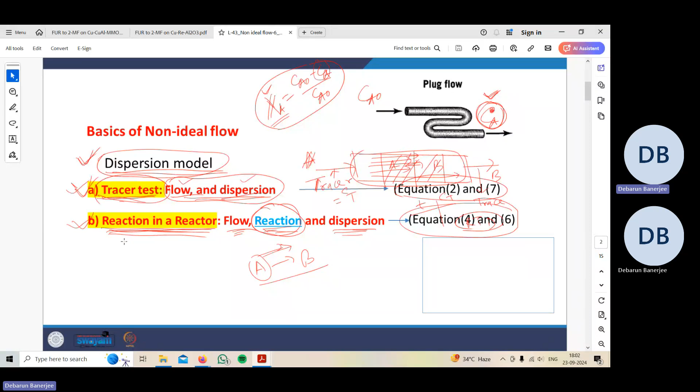For the tracer test, the dispersion model is used to describe non-ideal tubular reactors, where there is an axial dispersion of the material, governed by an analogy to Fick's law of diffusion. So what is Fick's law of diffusion?

It's minus D times Ac dC/dZ for transport by bulk flow, U times Ac times C, in moles per second. So every component in this mixture will be traversing through any cross section of the reactor at a rate equal to this, which we generate from Fick's law of diffusion, resulting from molecular and convective diffusion.

If you see, this is the standard plug flow where there is no difference between each of the molecules. But if there is dispersion in the reactor, then it's problematic - certain molecules will be diffusing forward, and others will be lagging behind. So there will be a different concentration profile with and without dispersion.

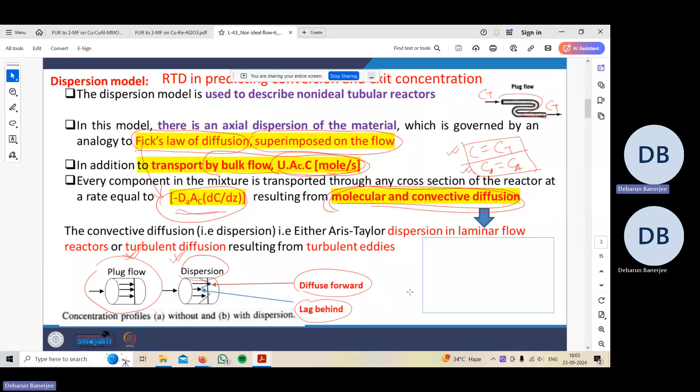That's why we need the dispersion model, which will calculate the dispersion profile. We'll have to see how dispersion affects the concentration profile in a tubular reactor.

Some molecules will diffuse forward ahead of the molar average velocity, while others will lag behind. So we consider the injection of a perfect tracer pulse, and this dispersion causes the pulse to broaden as it moves down the reactor and becomes less concentrated.

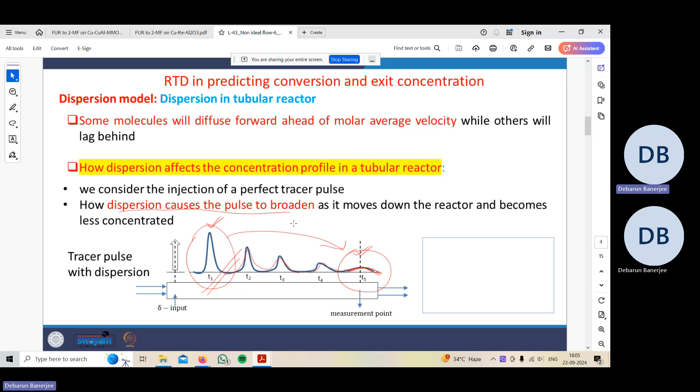We consider the injection of a perfect tracer pulse, and dispersion causes the pulse to broaden as it moves down the reactor, becoming less concentrated. The molar flow rate of tracer Ft, by both convection and dispersion, is del CT del Z plus U CT multiplied by Ac.

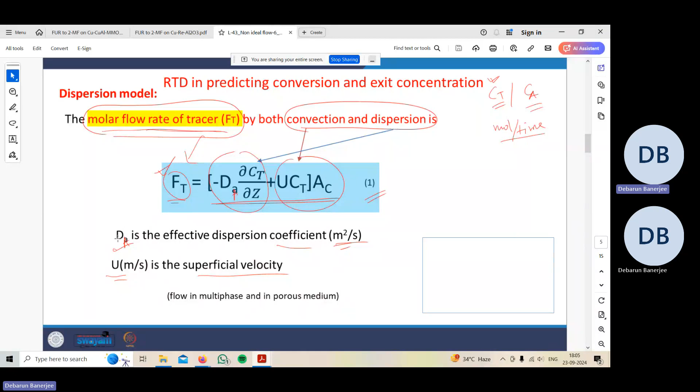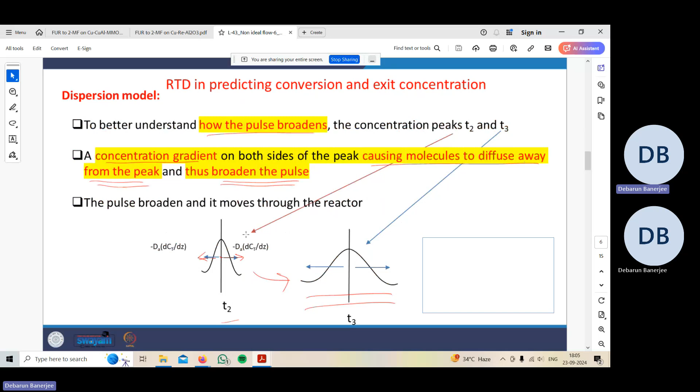To better understand how the pulse broadens, consider the concentration peaks at T2 and T3. A concentration gradient on both sides of the peak causes molecules to diffuse away from the peak, thus broadening the pulse. The pulse broadens from the T2 position and moves towards the T3 position.

If you substitute this mole balance equation, minus del F del Z equals Ac times del CT del T, substitute for Ft and divide by the cross-sectional area Ac, we get this equation for dispersion.

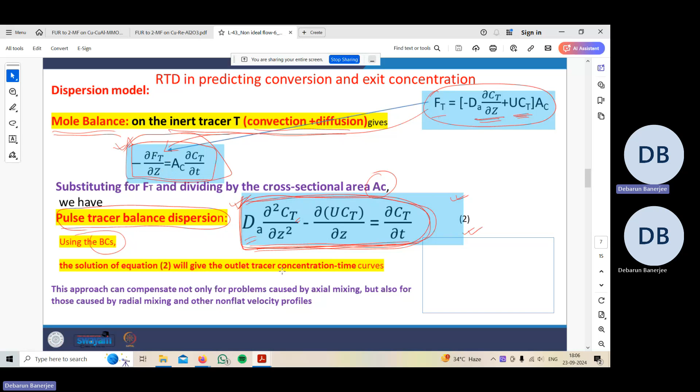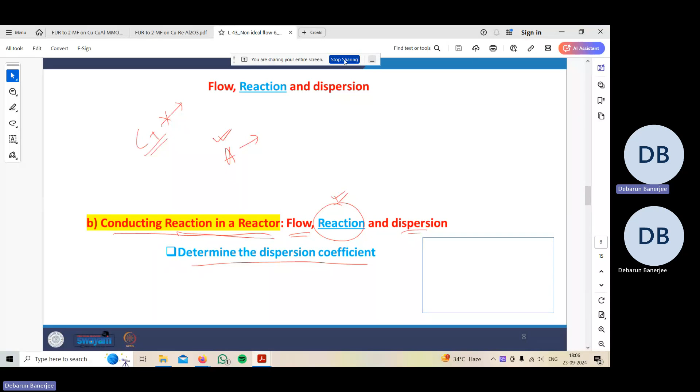The second approach: you have to find the dispersion coefficient, so a mole balance equation of a PFR is required. A mole balance is taken on a particular component of the mixture over a short length delta Z of a tubular reactor of cross section Ac, to arrive at the equation minus 1 over Ac dF/dz.

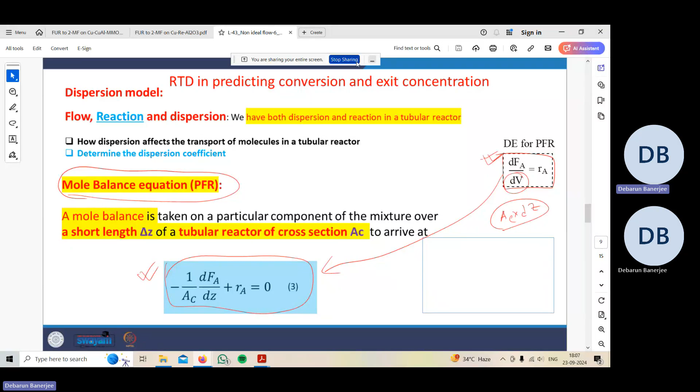If you combine this mole balance equation number 3 with the equation of the molar flux Fa, you get minus 1 over Ac dF/dz plus Ra equals 0, which comes from Fick's law of diffusion as D/U d2Ca/dz plus Ra/U equals 0.

So ultimately, the molar flow rate F in the Z direction of a tubular reactor, Faz, equals Ac WAz, equals minus D(dC/dz) plus CA U Z Ac. So the entire equation represents dispersion plus flow plus reaction - this is the entire regime.

So what is in the dispersion regime? We've seen the dispersion regime - equation 4 is responsible for an analytical solution. What is that analytical solution? We have this solution where we consider phi equals Ca by Ca naught, and lambda.

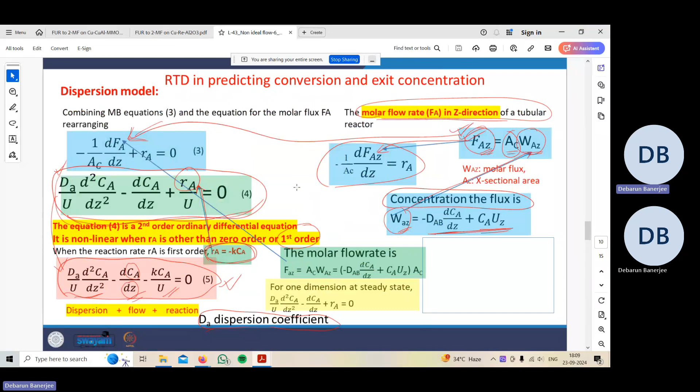These are again characteristics of non-ideal reactors, which are unitless and dimensionless numbers. The Damkohler number is the rate of consumption of A by reaction divided by rate of transport of A by convection, equals to K tau, equals to K CA0 to the power n minus 1.

Similarly, another dimensionless number is the Peclet number, which is the rate of transport by convection divided by rate of transport by diffusion or dispersion.

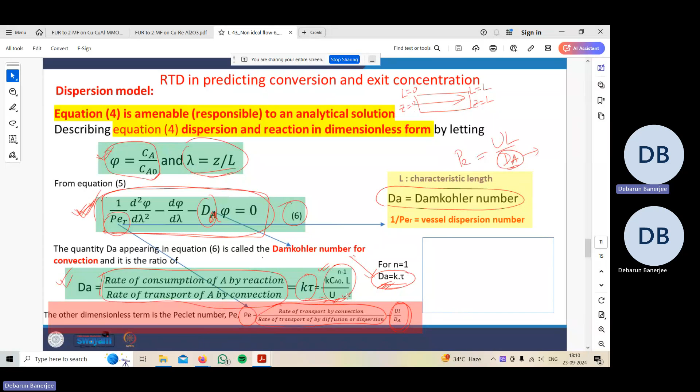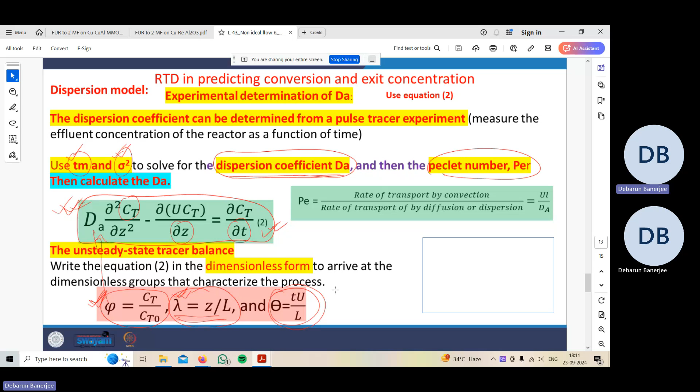Similarly, you can also determine the Damkohler number by experimental observations in this way. The unsteady state tracer balance, as discussed earlier, will have to be used for experimental determination of this dimensionless number.

This is an example of a tracer test, and the method of injection of the tracer is the pulse injection. So find the dispersion number dA or the Peclet number using the tracer test.

The equation is this: 1 by Peclet number, d2 phi d lambda square, minus d phi d lambda, equals to d phi d theta. So the steady state flow of A will give you 1 by Peclet number, and this is a similar formula.

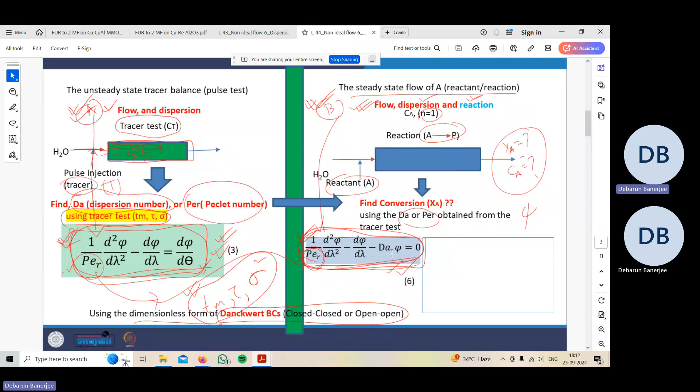What you will have to do is just express it in terms of the Damkohler number.

There are two types of boundary conditions here: one is the closed vessel, one is the open vessel. There is an analytical solution for the first order reaction in terms of the Peclet number and the Damkohler number.

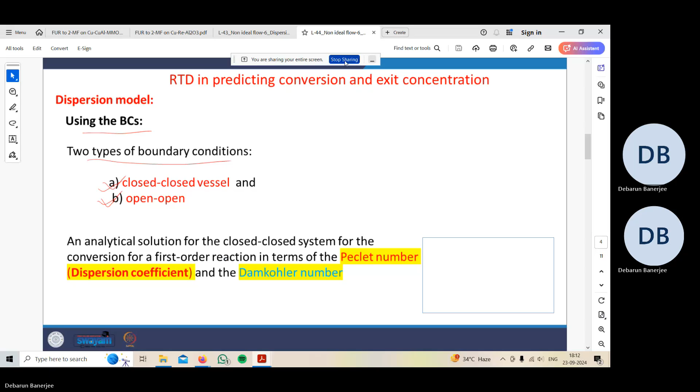For the closed vessel system, the assumptions are there is no dispersion or radial variation in concentration either upstream or downstream of the reaction section. The boundary conditions are imposed on the plug flow velocity profile.

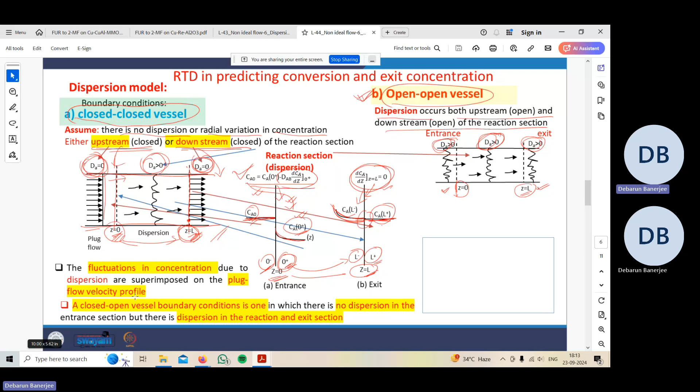In the open vessel situation, the dispersion occurs both upstream and downstream of the reaction section. A closed-open vessel boundary condition is one in which there is no dispersion in the entrance section, but there is dispersion in the reaction and exit.

Ultimately, you have to solve this particular equation shown here. You'll have to solve the equation, and ultimately you'll get CA naught equals to minus dA by U, del CA del Z, at Z equals to 0, plus CA 0 plus, based on the Danckwerts boundary conditions.

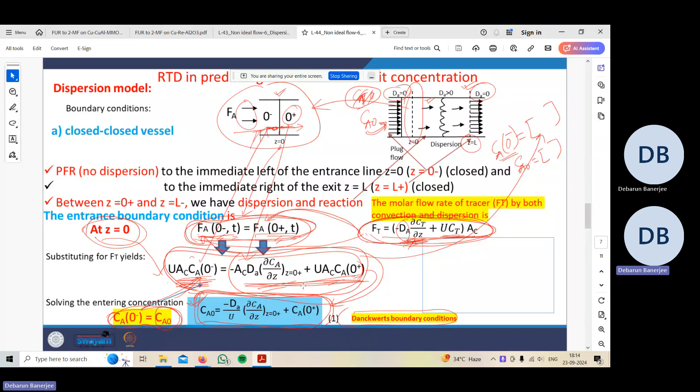For the closed vessel system, at the exit of the reaction section, the concentration is continuous, and there is no gradient in tracer concentration.

So the two boundary conditions: at Z equals to L, CA naught L minus equals to CA L plus, and del C del Z equals to 0; and at Z equals to 0, CA naught equals to minus d by U, del C del Z plus CA.

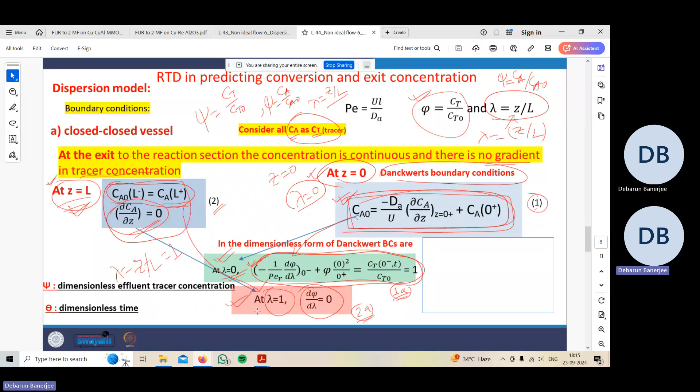So at lambda equals to 1, d psi d lambda equals to 0. The dispersion model comes to this: 1 by Peclet number, d2 psi d lambda square, minus d psi d lambda, equals to d psi d theta.

The first moment is the mean residence time, equals to tau. The second moment, based on the variance, sigma square (variance by mean residence time square) equals to 1 by tau square, integral from 0 to infinity of (t minus tau) squared, e, dt.

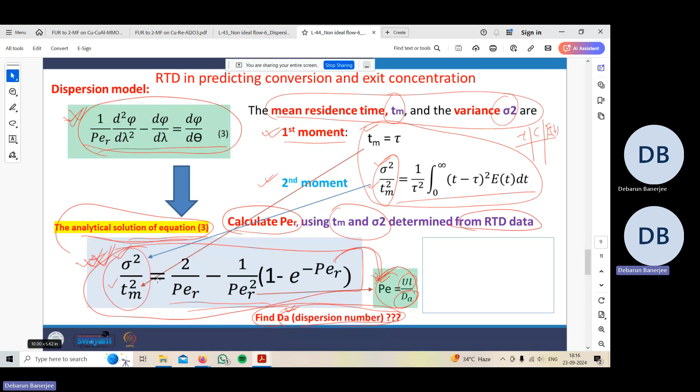Putting these values into equation 3, the analytical solution comes as: sigma square by tm square equals to 2 by Peclet number, minus 1 by Peclet number square, times (1 minus e to the power minus Peclet number).

So you have to find the dispersion number. Based on the dispersion model discussed earlier, if you see this graph, the middle line is for plug flow, which is d by uL equals to 0.

The right line is for d by uL equals to 0.002, meaning there is a small amount of dispersion. Remember, this graph is based on psi versus theta, where theta is t by tau. And mixed flow means d by uL will be infinite.

This equation has been solved numerically for a pulse injection, and the dimensionless effluent tracer concentration psi is shown as a function of the dimensionless time theta, equal to t by tau, for various Peclet numbers. Based on these Peclet numbers, D by uL, you can find out the category of dispersion in your reactor.

As low as this dispersion number value will be, the reactor will be more towards the ideal plug flow reactor. As high as entirely infinite, it means entirely mixed flow. As low as 0.002, it will have a small amount of dispersion. 0.025 means intermediate dispersion, and 0.2 is large dispersion. These are some example values shown here.

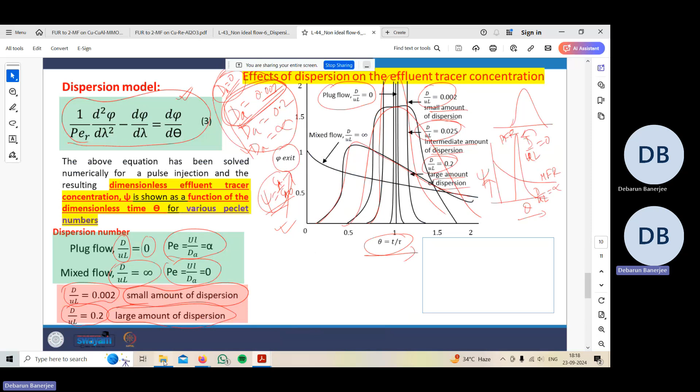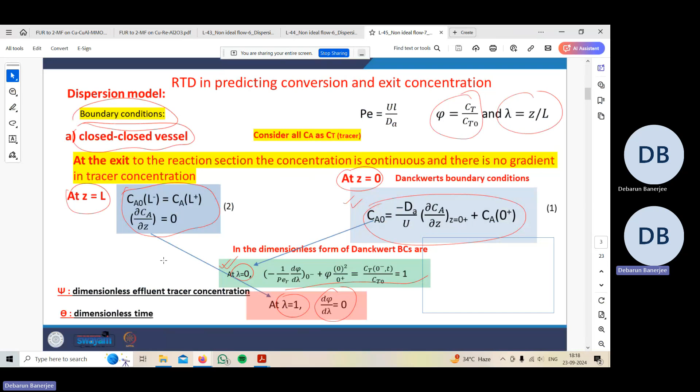So this will be the final dispersion model slide here today. We have already seen this relationship between the mean residence time and the variance: sigma square by tm square equals 2 by Peclet number minus 1 by Peclet number square into 1 minus e to the power minus Peclet number.

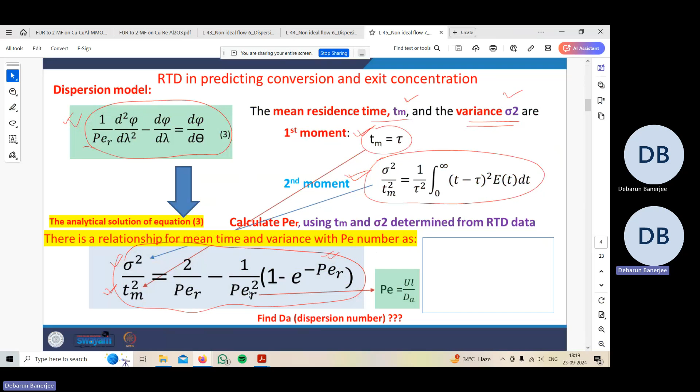I've seen this particular graph in the slide same as earlier, for the closed vessel system. Now for the open vessel system, we have to see both the boundary conditions and the open cases. We call it as open boundary conditions.

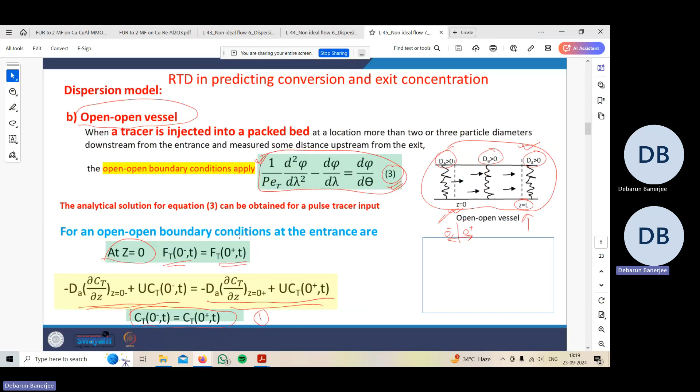So 1 by Peclet number d2 psi d lambda square minus d psi d lambda equals d psi d theta. The concentration psi at location 1, theta, equals Ct L comma T divided by Ct0, equals 1 by 2 square root of pi theta by Peclet number, exponential of minus 1 minus theta whole square divided by 4 theta by Peclet number.

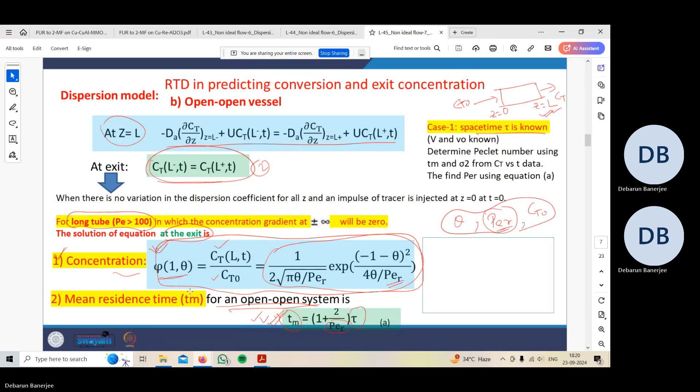So the mean residence time for an open system is Tm equals 1 plus 2 by Peclet number, into tau. To calculate for an open system, tau is based on the volume between z equals 0 and z equals L. The mean residence time for an open system will obviously be greater than that of a closed system, due to dispersion, so Tm will be greater than tau.

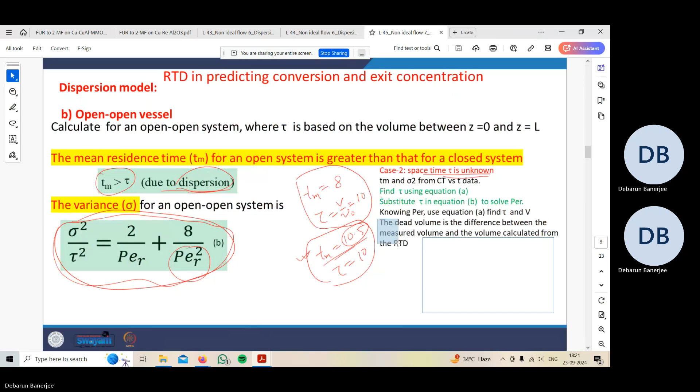The variance, sigma square by tau square, equals 2 by Peclet number plus 8 by Peclet number whole square. Case 2: if the space time tau is unknown, find Tm and sigma square from Ct versus T data. Find tau using equation A, substitute tau in equation B to solve for the Peclet number. If Peclet number is known, use equation A to find tau and V, the dead volume, which is the difference between the measured volume and the volume calculated from RTD.

It's not always possible to inject a tracer pulse cleanly as an input to the system. It takes a finite time to inject the tracer. When the injection doesn't approach a perfect pulse input, the difference in the variances between the input and output tracer measurements are used to calculate the Peclet number.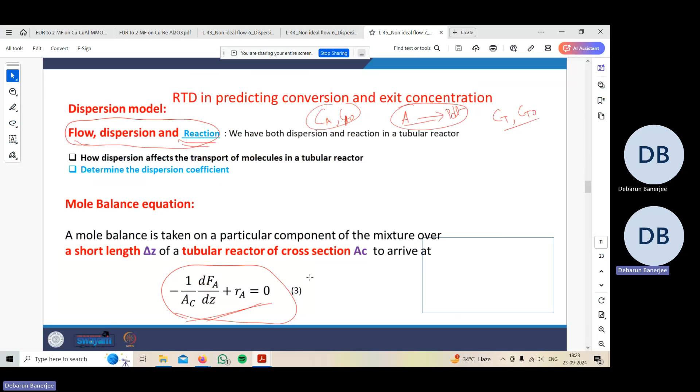Again, this small equation we write down: minus 1 by AC d to dz plus Ra equals 0, or Da by u d2ca dz square minus dc dz plus Ra by u equals 0. Also, d faz dz equals Ra, and concentration flux Waz equals minus D dc dz. So Da by u d2ca dz square minus dc dz plus kca by u equals 0.